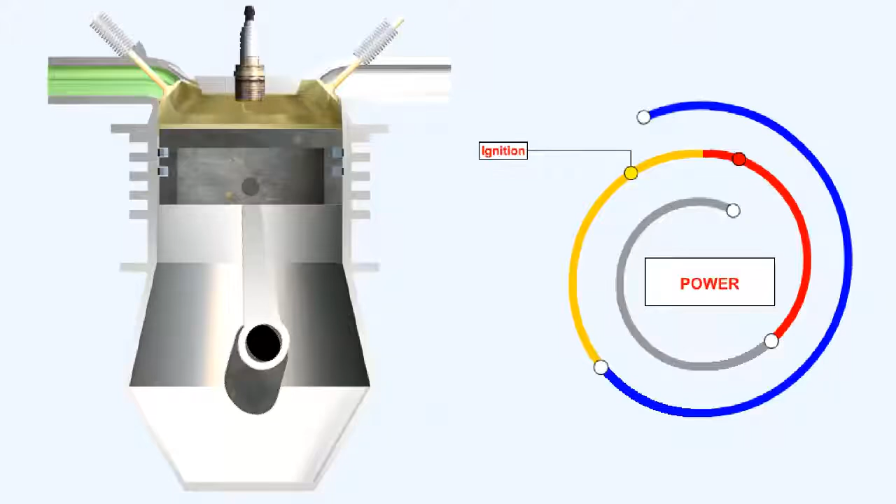By the time the crankshaft has turned through 45 degrees after top dead center on the power stroke, the pressure in the cylinder has dropped to approximately half its peak value. And by 90 degrees of crankshaft rotation after top dead center, most of the pressure energy in the gases has been converted into mechanical energy.

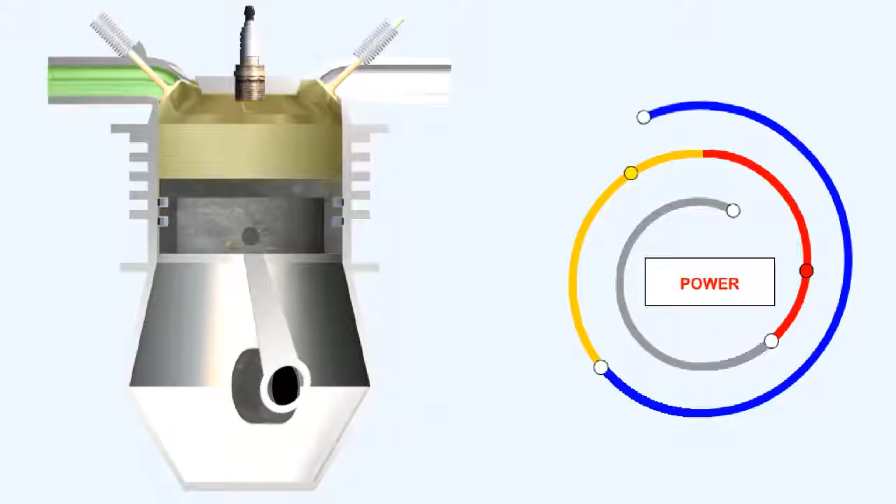If the exhaust valve is opened before the crankshaft reaches bottom dead center, shown here in our example at 62 degrees before bottom dead center, the residual pressure will start the first stage of exhaust scavenging, so that by bottom dead center there is very little residual pressure on the piston which will impede its progress when it starts the exhaust stroke.

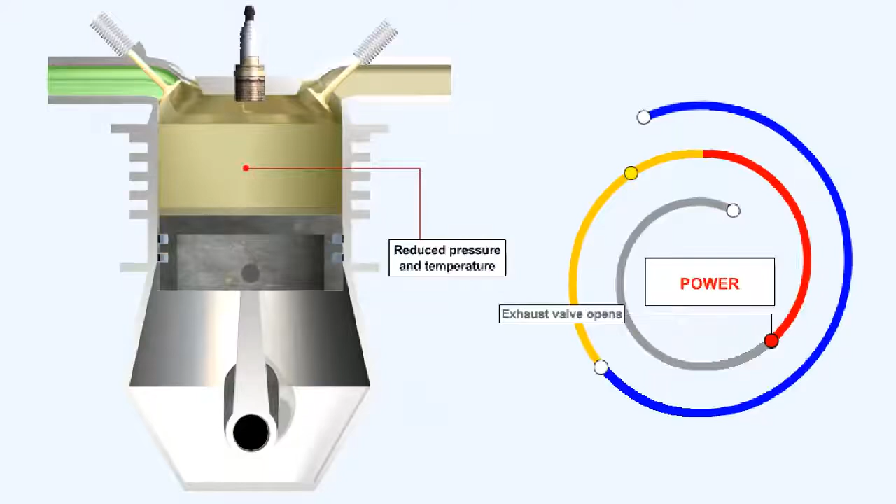This procedure is called pressure scavenging. It does not produce a significant loss of mechanical energy for two reasons. Firstly, there's only a short distance left for downward movement of the piston after the exhaust valve is opened. And secondly, relatively little pressure is still being exerted on the piston by the cooled and expanded gases.

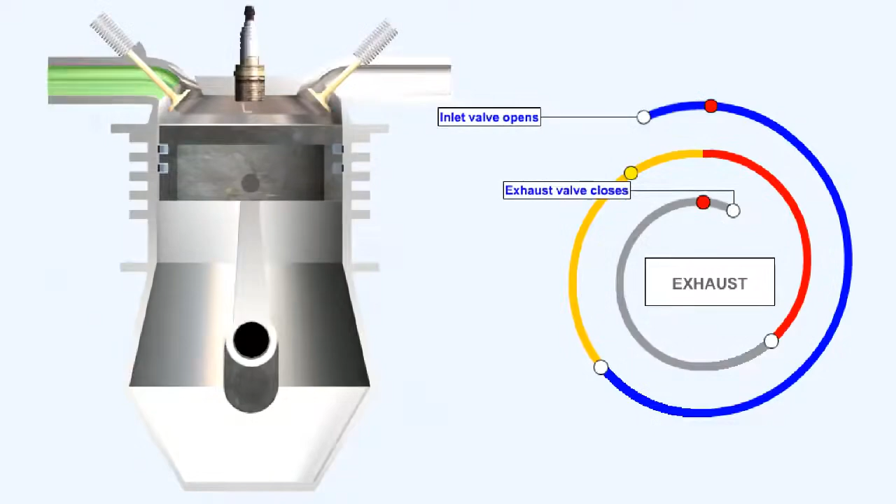Finally, the piston moves upwards, forcing the remaining gases out of the cylinder. In our example, the exhaust valve is left open until 30 degrees after the crankshaft has passed top dead center, to encourage the gases to scavenge the cylinder as completely as possible by their own momentum.

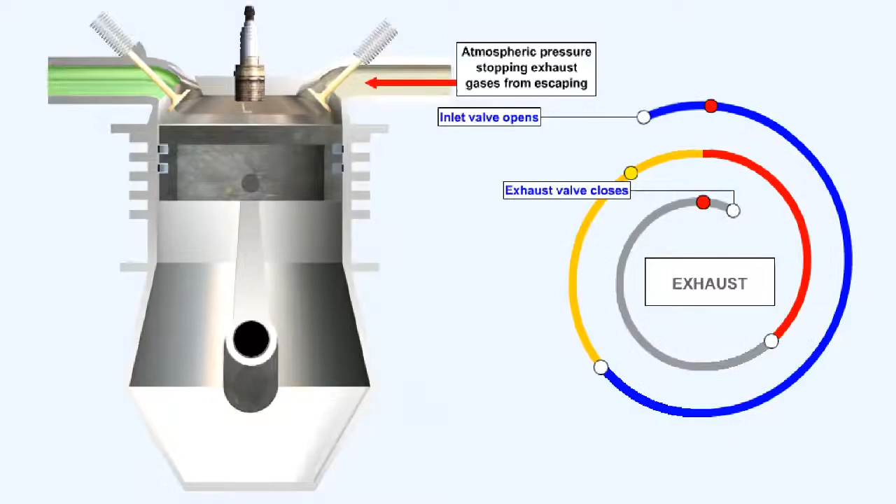We've already mentioned that the exhaust gas must be forced out of the cylinder against the pressure of the atmosphere. This fact becomes very significant when we discuss supercharged and turbocharged engines in a later lesson.

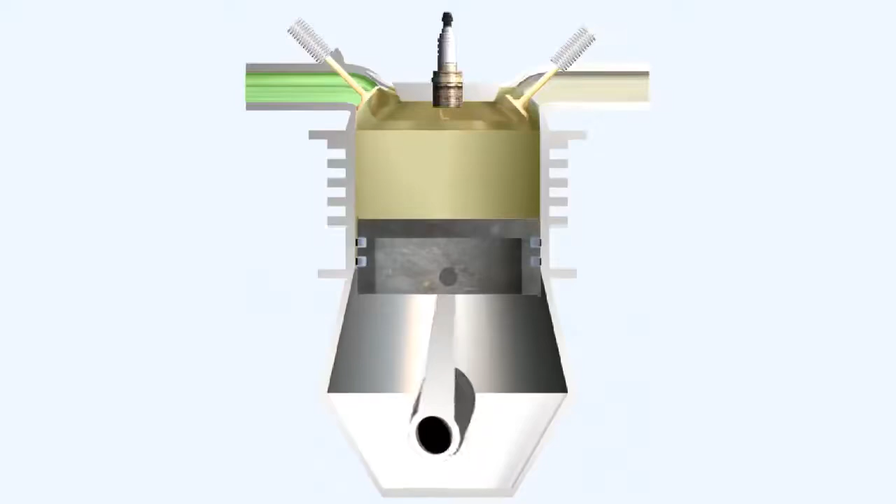We've already mentioned that engine efficiency can be improved by opening and closing the inlet and exhaust valves at times other than crankshaft top dead center and bottom dead center. We'll now look a little closer to see more precisely why this procedure works so well.

About the crankshaft position of top dead center and bottom dead center, the distance the piston moves is very small compared to the large angular movement of the crankshaft.

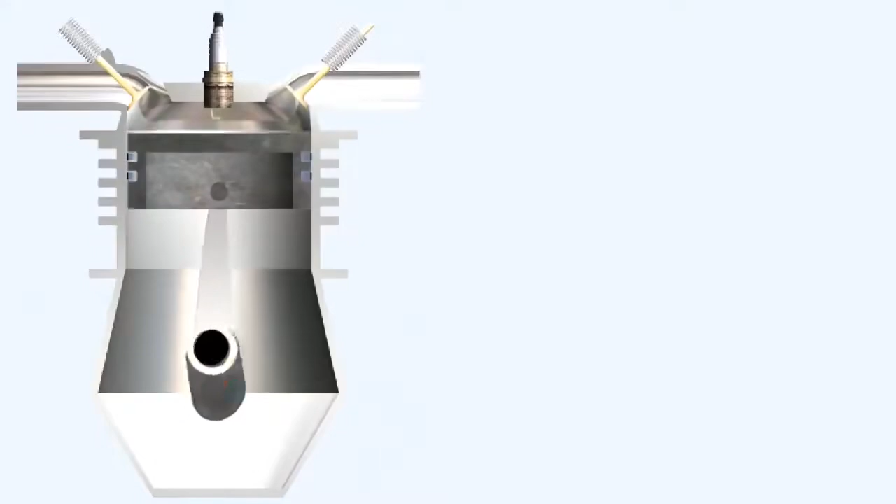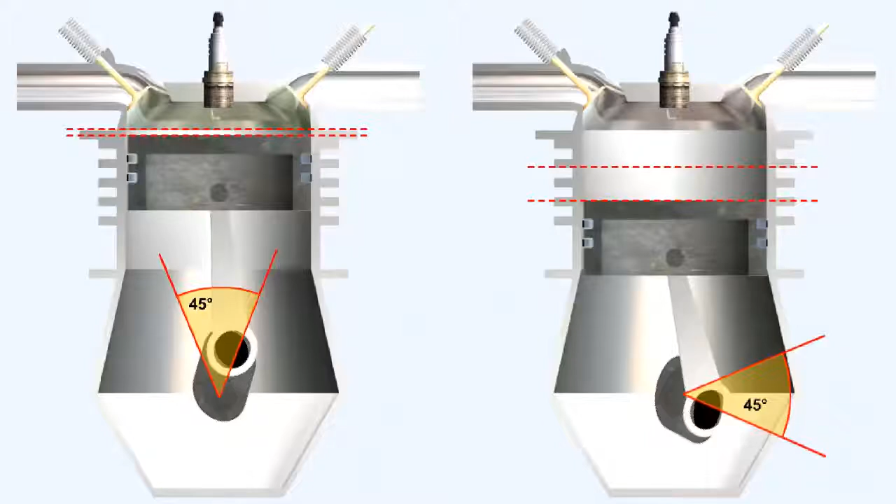Because of this minimal piston movement as the crankshaft moves around top and bottom dead center, this arc is called the ineffective crank angle.

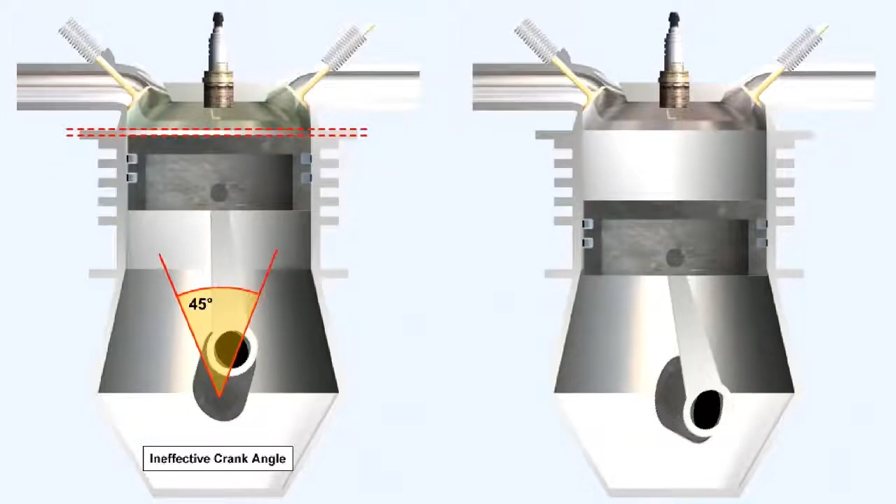As there is little change in the cylinder volume as the crankshaft rotates through the ineffective crank angle, the weight of charge entering into the cylinder and the scavenging of the burnt gases can be improved by opening the valves early and closing them late.

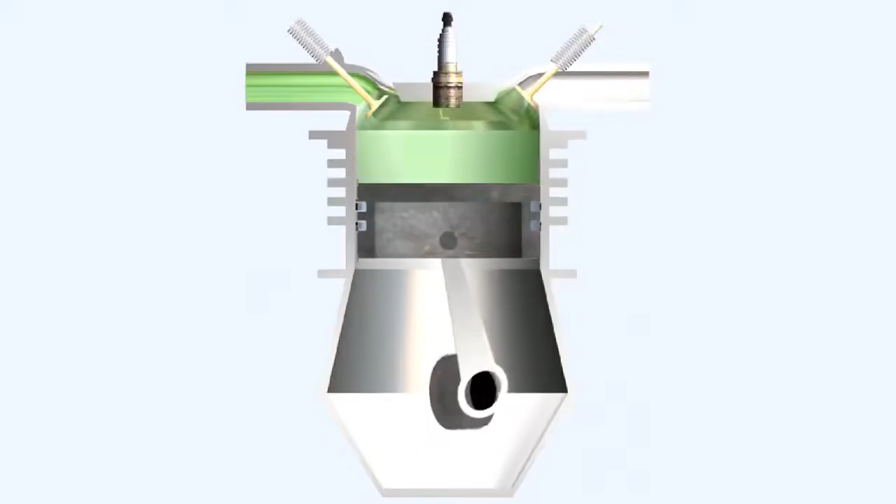These changes to the valve timing are named valve lead, valve lag, and valve overlap. Valve lead refers to when the valve opens before the theoretical opening time, for example when the inlet valve opens before crankshaft top dead center, or when the exhaust valve opens before crankshaft bottom dead center, as shown here.

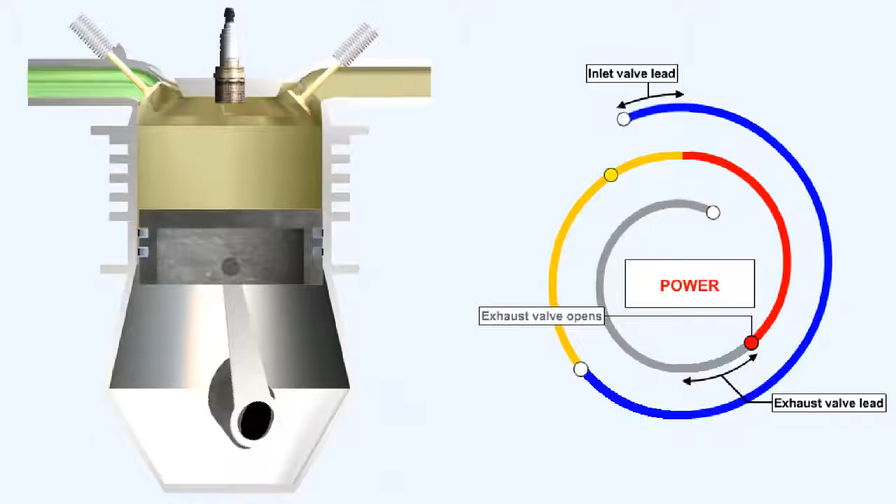Valve lag occurs when a valve remains open after the theoretical closing time, for example when the inlet valve remains open after crankshaft bottom dead center, or when the exhaust valve remains open after crankshaft top dead center.

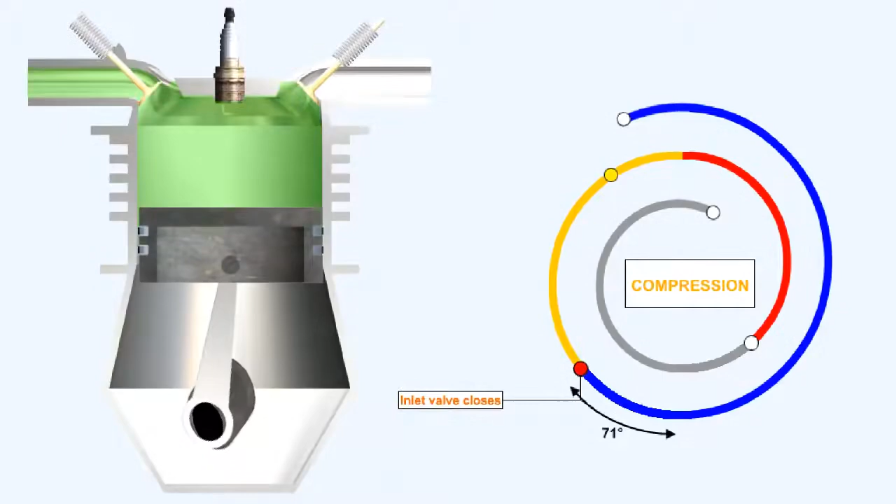Valve overlap refers to a period when both valves are open together. During this period, the action of the exhaust gases flowing out of the cylinder tends to reduce the gas pressure in the cylinder to below that of the mixture in the induction manifold. Thus, the mixture starts to flow into the area of low pressure and assists in displacing the remaining burnt gases. By doing so, it improves the volumetric efficiency of the engine by inducing a greater weight of charge into the cylinder.

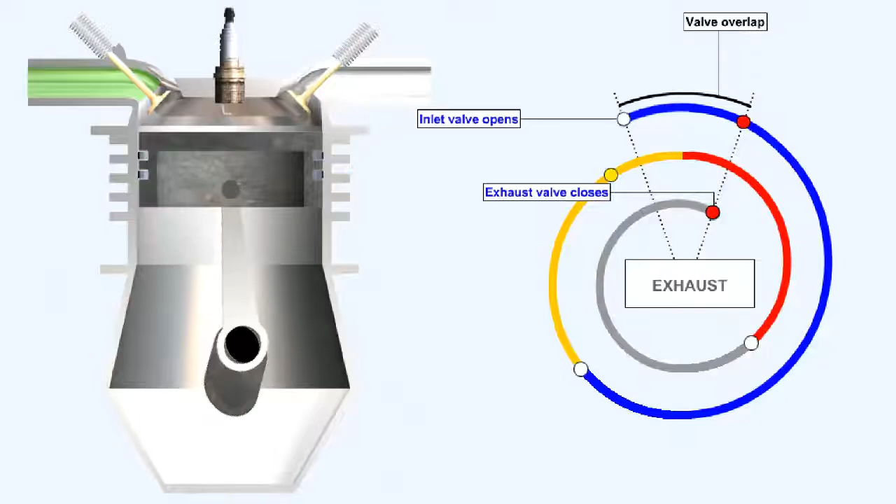The volumetric efficiency of an engine can be found by comparing the weight of mixture induced into the cylinder during engine operation to that which would fill the cylinder under standard atmospheric conditions when the piston is stationary at the bottom of its stroke.

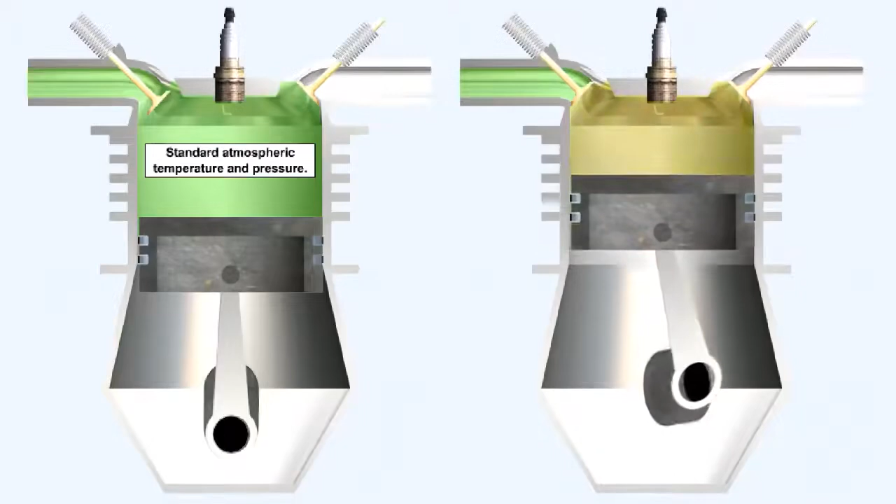It's very important to remember that the valve timing for any particular aircraft engine, the setting which determines when the valves open and close, is fixed and does not vary with engine speed.

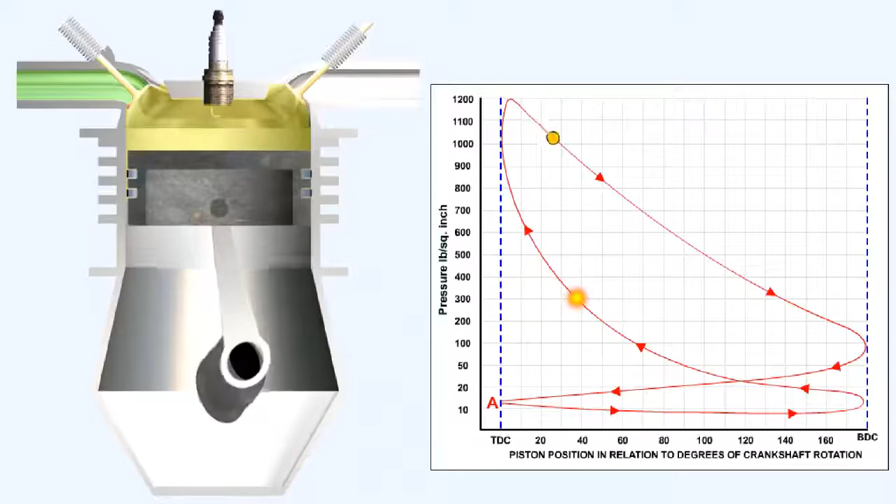Historically, a device known as an indicator was attached to research and experimental engines. This measured both the variations in cylinder pressure and the changes in piston position throughout the 4 strokes of the operating cycle. By means of a mechanically operated pen, the device plotted pressure against volume on what was known as an indicator diagram, or pressure-volume PV diagram, an example of which is shown here.

Modern technology utilizes electronic sensing devices to obtain the same information.

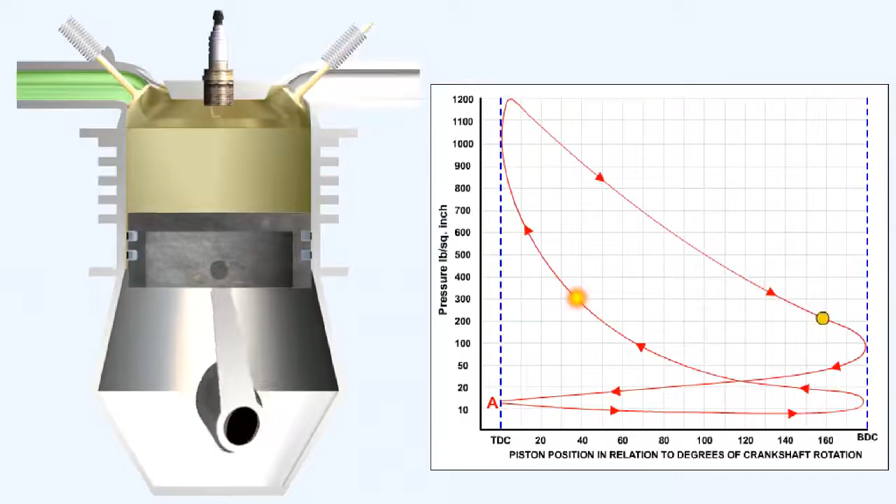The indicator diagram is used to plot the variation in the pressure obtained. This determines the shape and the area enclosed by the graph. This area is representative of the work done by the gas and the power produced by the engine.

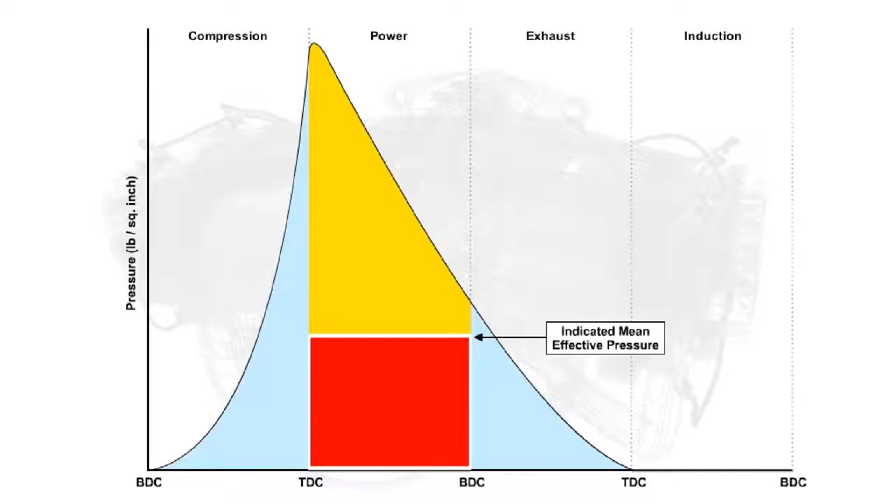Subtracting the sum of the blue coloured areas from the area within the power column leaves us with the red block. This is the average pressure on the piston during the working cycle. It's termed the indicated mean effective pressure, or IMEP.

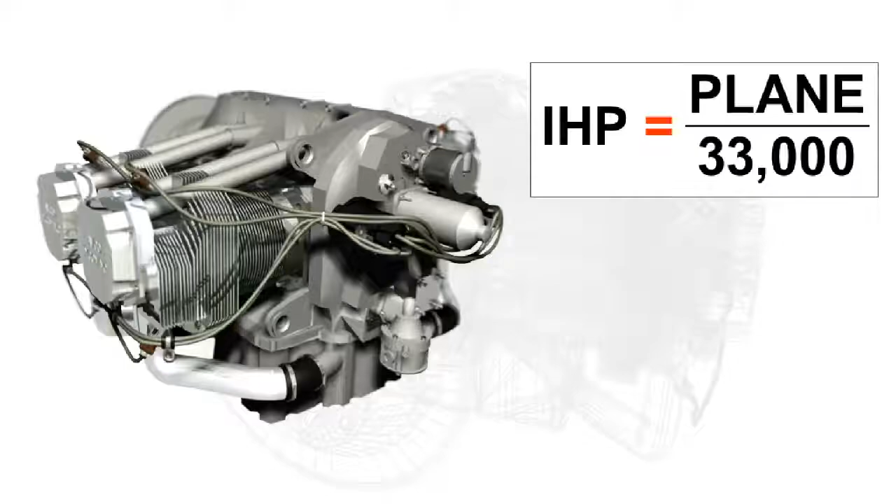Having found the indicated mean effective pressure in the cylinder, it's now possible to calculate the indicated horsepower, or IHP, of the engine concerned, using the formula IHP equals P times L times A times N times E divided by 33,000, where P equals the indicated mean effective pressure in pounds per square inch,

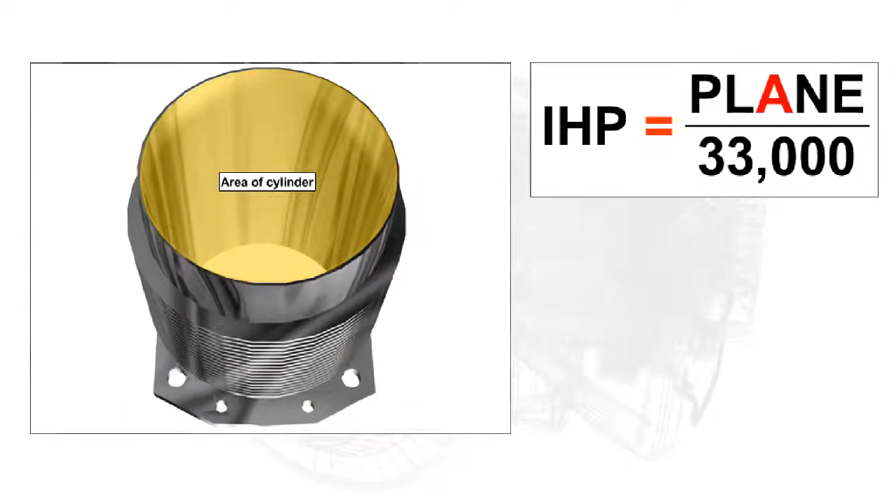L equals the length of stroke measured in feet, A equals the area of the cylinder measured in square inches, N equals the number of cylinders, E equals effective working strokes per minute, or half the RPM,

and 33,000, which is a constant that enables us to change foot-pounds of work per minute into horsepower, 1 horsepower being calculated by James Watt to be the equivalent of 33,000 foot-pounds per minute.

The SI unit of power is the watt, or 1 joule per second. 1 horsepower equals 746 watts.

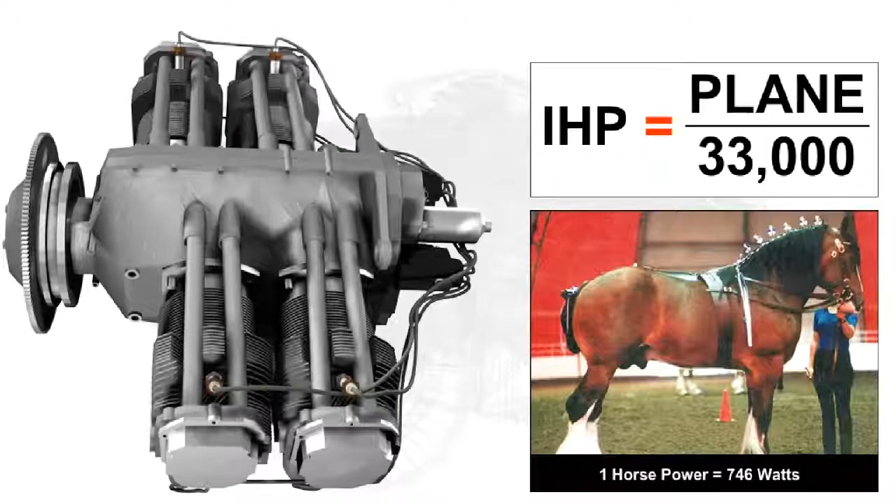Indicated horsepower is really only a theoretical concept. Power is required both to turn the crankshaft and move the piston. This power is called friction horsepower.

To deduce the amount of power which remains to do useful work, for example to turn the propeller or drive a gearbox, we must subtract the friction horsepower from the indicated horsepower. What remains is called brake horsepower, or BHP.